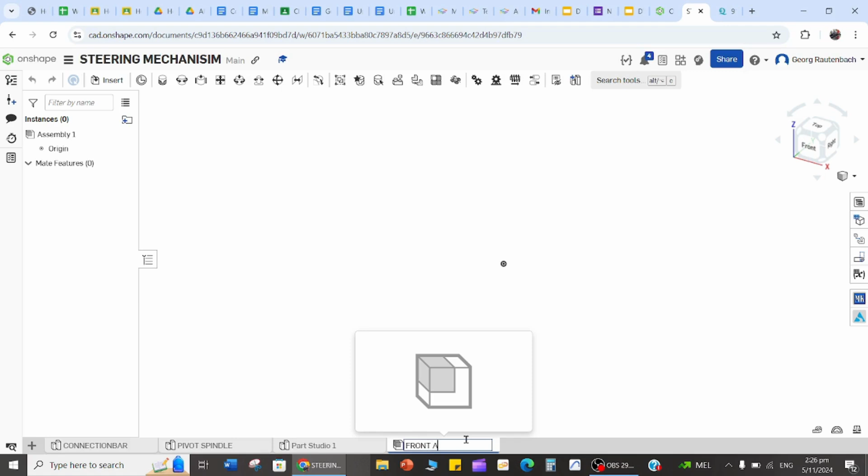I'm going to go insert, create new part studio, and then call it the front axle by right clicking on it. If I right click on that, you can just rename it and call it the front axle. Okay, so we're going to draw a front axle here. I accidentally opened an assembly by mistake, so I'll delete that one and create a new part studio. Then I'll right click on part studio 2, rename it, and call it front axle.

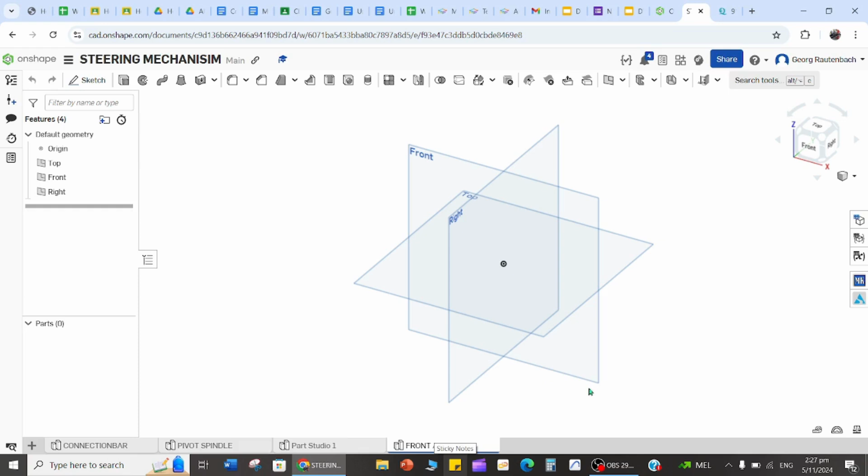Okay, and then I'm going to sketch the front axle here, so I'll go and start creating on the top plane. I can create a rectangle that is going to be 15 high, 10 wide, so I'll just do the corner point.

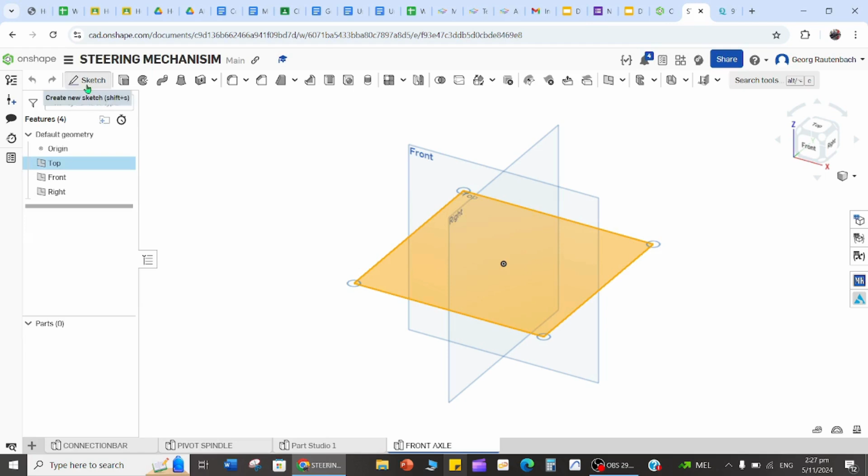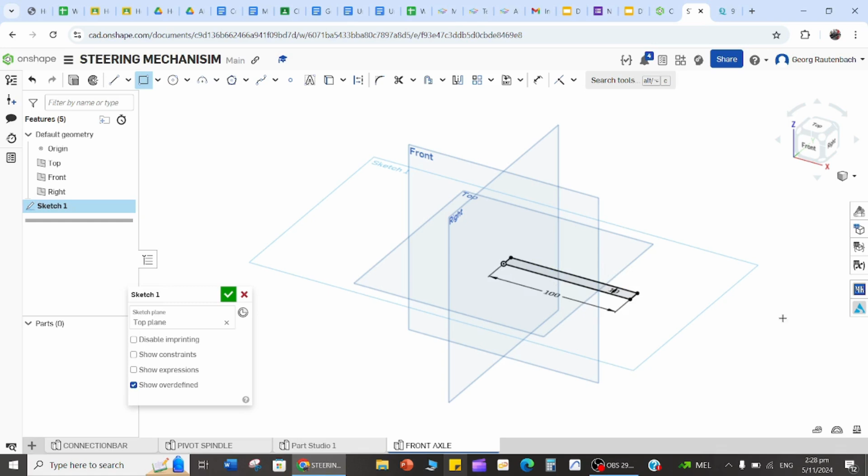So sketch the top plane, and then go to corner rectangle. I'm going to draw a corner rectangle here, and make it 100 long. I'll click once and make it 100, enter, and then make it 10 mils wide, enter, and then I will extrude that 15 mils.

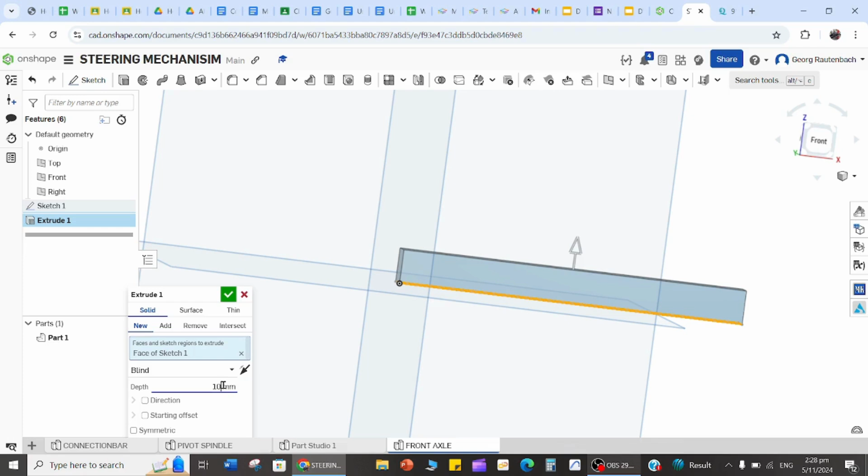I'll go to the extrude, click here, and instead of the 25 default extrude, I'll make it 15, enter, and then I can sketch my gaps in it as well. Let's make it not 15, let's make it 10. That looks better. No, it is 15, sorry. I'll make that 15, enter, and then I'm going to sketch on that.

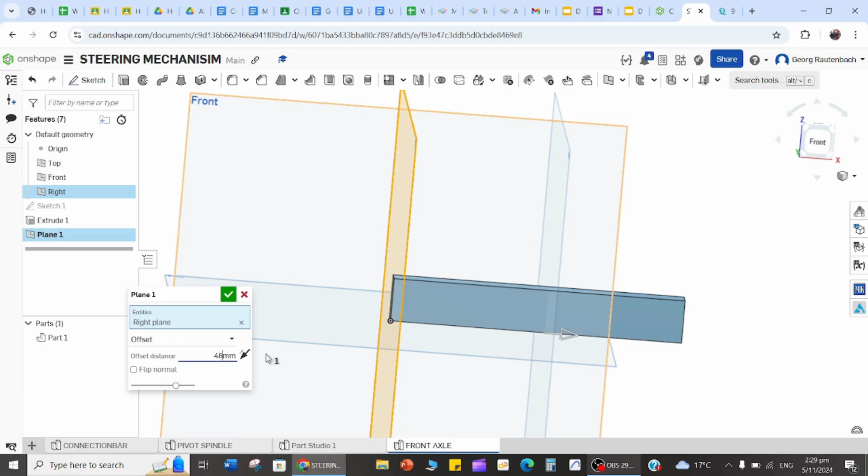So I want to sketch on this side and then on that side as well. If you want to sketch on one side and mirror it, you just have to put a plane right in the middle. So what I can do is go to the plane tool and use an offset plane, using my right plane as an offset, and then move it so it's in the middle. Since it was 97, it will be 48.5, and that will be right in the center. Then I can sketch on this side and mirror it on the other side.

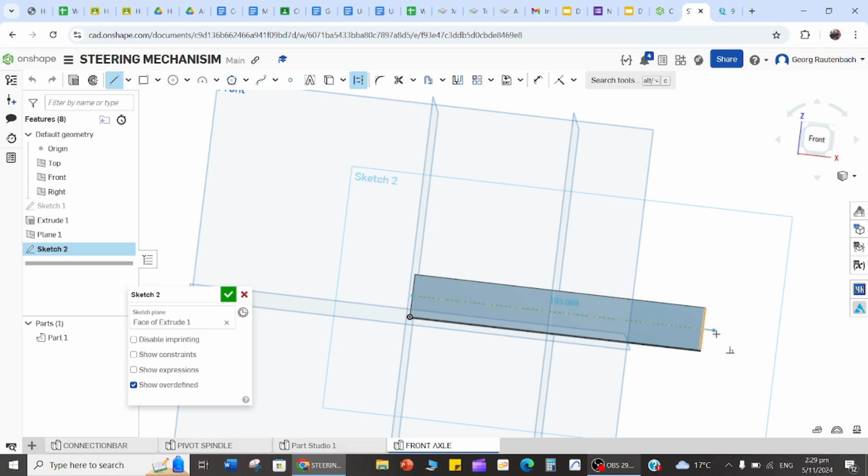So if I want to sketch on this plane, I'll quickly grab my sketch tool and click on that plane. Then I'll use my construction line, draw a line right through the middle, press escape, and then draw a line down, making that line 6 mils from the side. I'll do a construction line down there, and then go to my dimension tool and make that distance 6.86, enter.

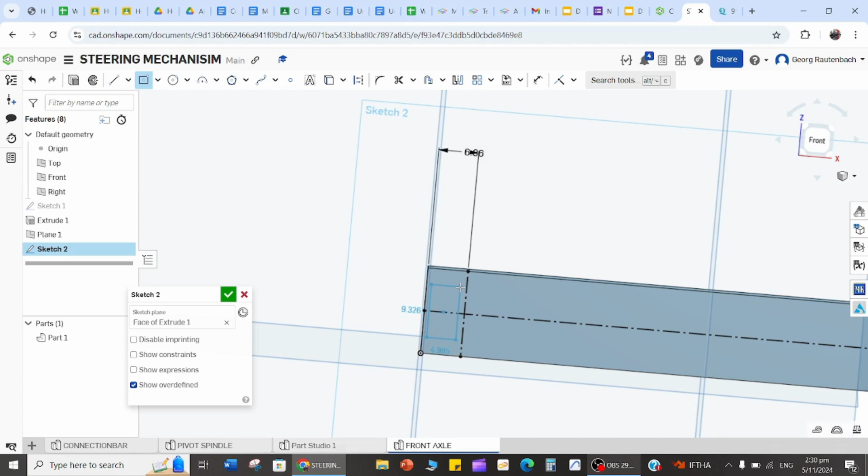Now I've got a little guide where I can draw using the center point rectangle. I'll hover over here and draw a center point rectangle, making sure it's on the line there. I'll click on this. I'll make the width 6.86, and I'll make the height 9.

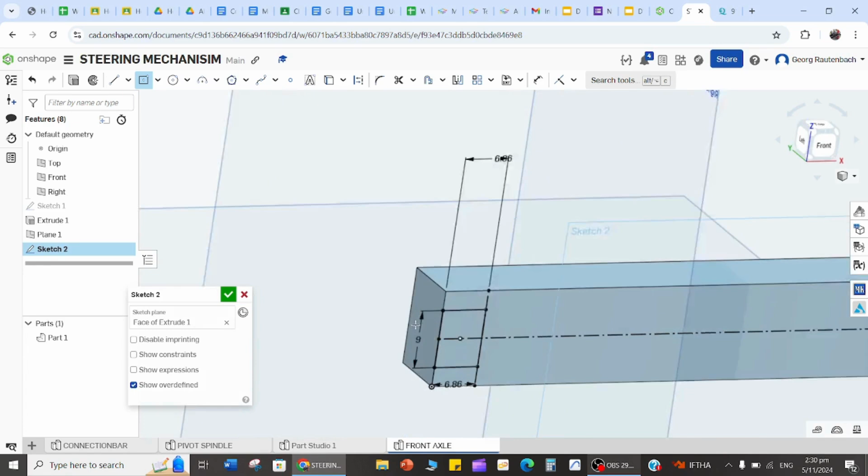And then I can extrude cut that right through. So I'll go to my extrude tool, click on that rectangle, and instead of adding, I'll remove it and give it a green tick. Now I just need to drill a hole right through and maybe just fillet the ends. So let's fillet the ends. We'll fillet them by 0.5, all those corners.

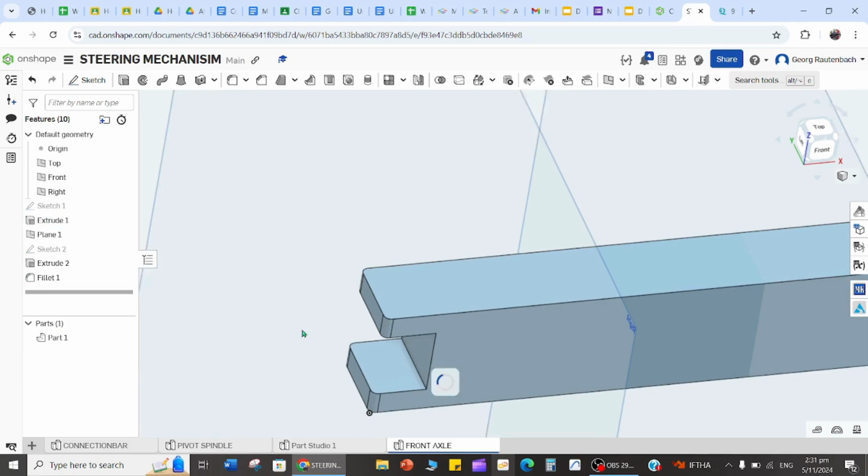It's just nice for the steering if you've got a roundabout there, and then we'll draw on the top of that. So we'll go to sketch, and on the top here I will draw the hole.

So I'll go with a 3mm hole there, just to house the pivot spindle that's going to hold the wheels.

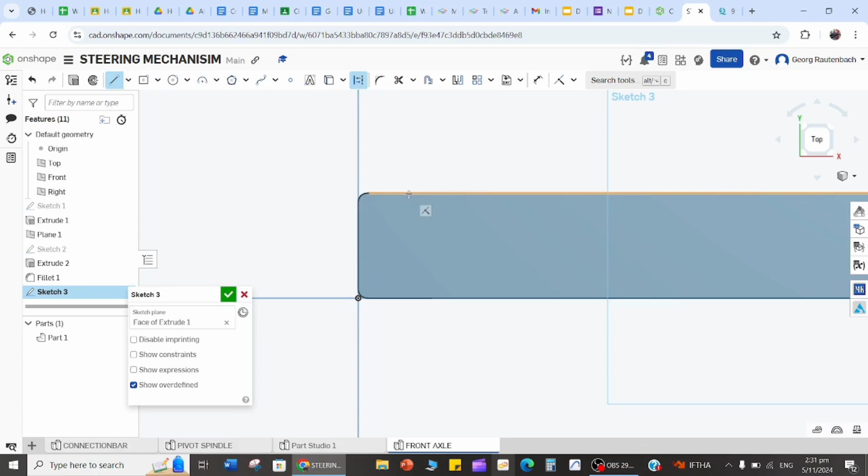So I'll draw a construction line again, and then go here, make the construction line about 4mm from the end, enter, and then a center line there.

So I'll use the line, my construction line tool, hover over until you get the orange block, draw a center line there, get the pivot. Oh, I didn't - I'll just have to Control Z that. You have to switch off the construction, otherwise everything else that you sketch stays as a construction line.

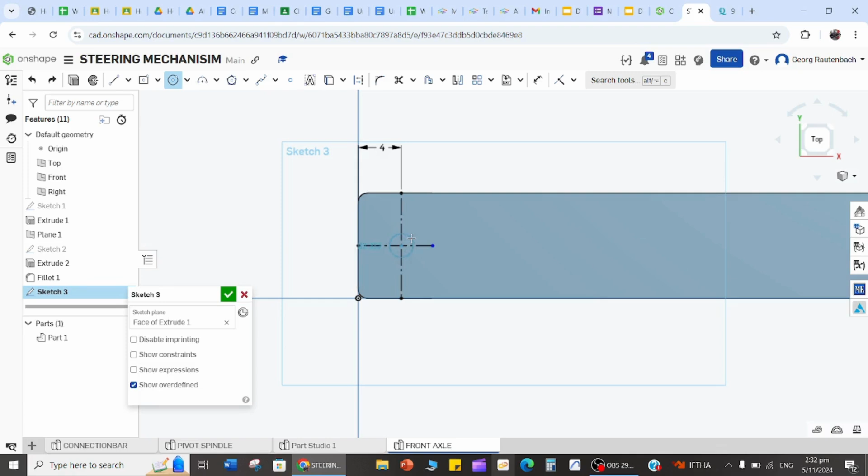So we'll make that 3mm, enter, and now I'm going to extrude that right through as well. So I'll grab the extrude tool, choose remove, and then I've got that there.

So now I just want to mirror this to the other side. What I'll do is go to the mirror tool, which is just this, and then I want to mirror feature, so it's going to be that, and then my mirror plane is going to be there, and then I'll just give it a

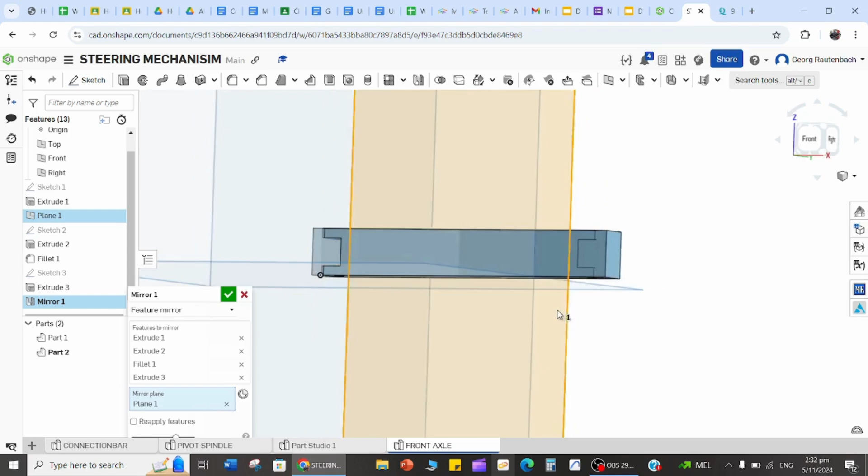green tick. I just want to see something's not right - Control Z. Maybe my center line, my center mark's not right in the center.

I'll just see if we go to mirror, maybe we'll just mirror a feature, and then the feature I want to mirror is that, and then my mirror plane is this side.

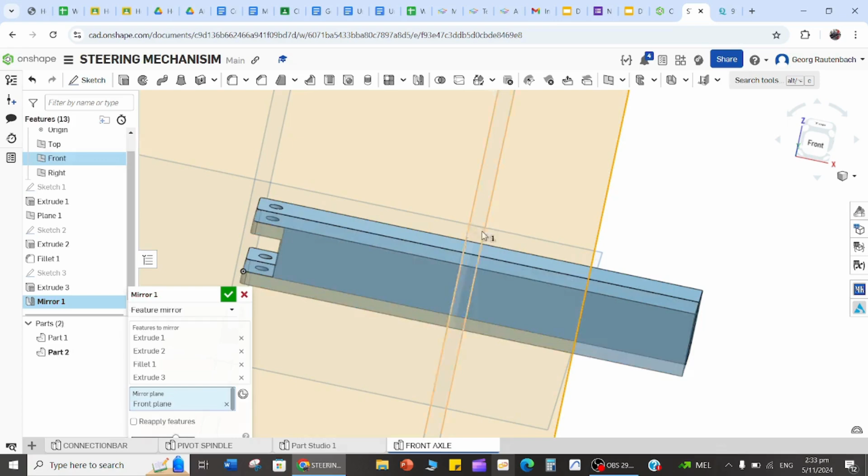No, I've chosen the wrong mirror plane. It's this one, and somehow... maybe I'll just mirror, use the feature mirror tool, and I'll just mirror that feature.

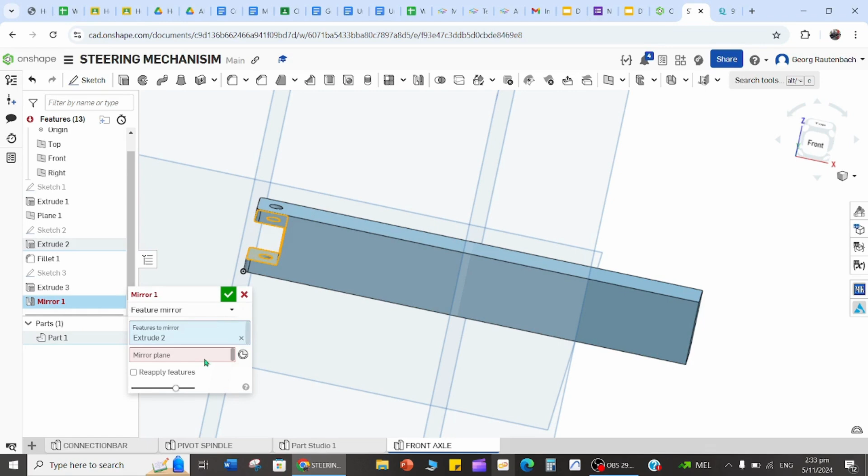No, Control Z. Click on the inside, and that's the feature I want to mirror, and that's my mirror plane. Give it a green tick.

Oh no, it doesn't like something. I don't think I'm on the center, so we'll just draw it on this side again quickly. So I'll click on that plane, sketch, and then I'll just sketch the whole part that I've sketched.

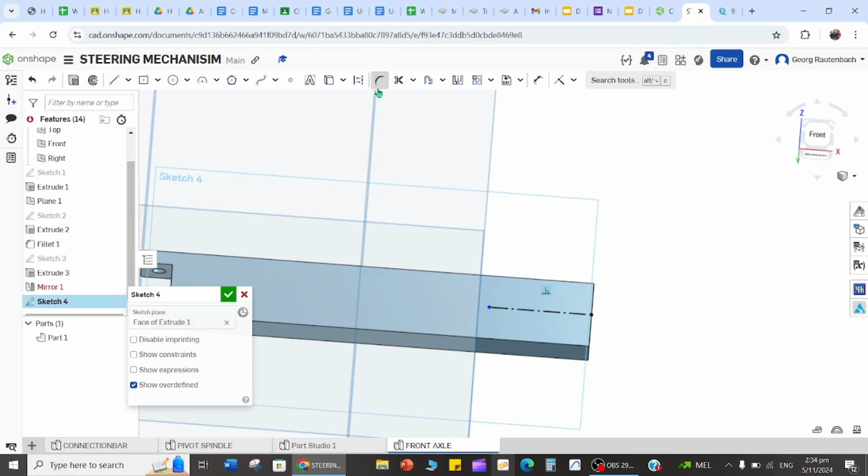So: line, construction line, draw a center line there, press escape, draw a line that's 6.86 down. So construction line, draw a line first at a random length, grab the dimension tool, draw a line that's

6.86, enter. Now I've got the guide for my center point rectangle, so I'll just grab the center point rectangle and draw it there, and make my first measurement 6.86.

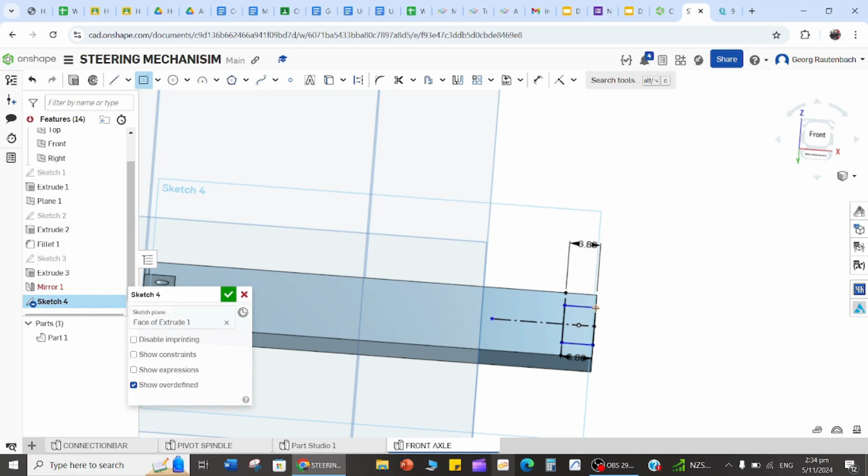Enter. My second measurement 9, enter, and then I'll just extrude and cut that out. So I'll go to the extrude, and then remove, give it a green tick, and then I'll just have to drill the hole in the top again.

So what I did is - let's see if we can - no, it won't mirror that. So sketch the top plane there, construction line, the line tool, draw a line there.

Make it 4mm from the end, 4mm, enter, draw a center line - line tool, construction line tool - grab a center line, draw it across, escape, use

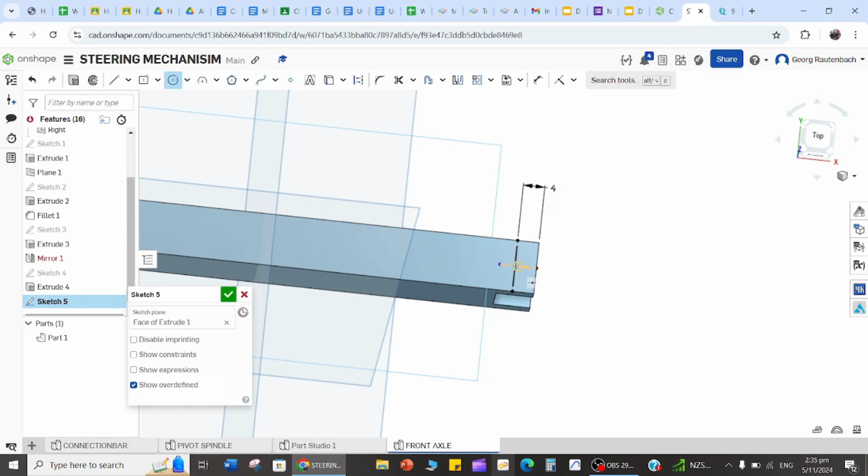this circle tool - I'm not on the center point there - circle, then make sure you're on the center point, make it 3mm, and then extrude, remove that.

So I'll go and extrude, remove, give it a green tick. Now I've got that, and I just have to fillet the end.

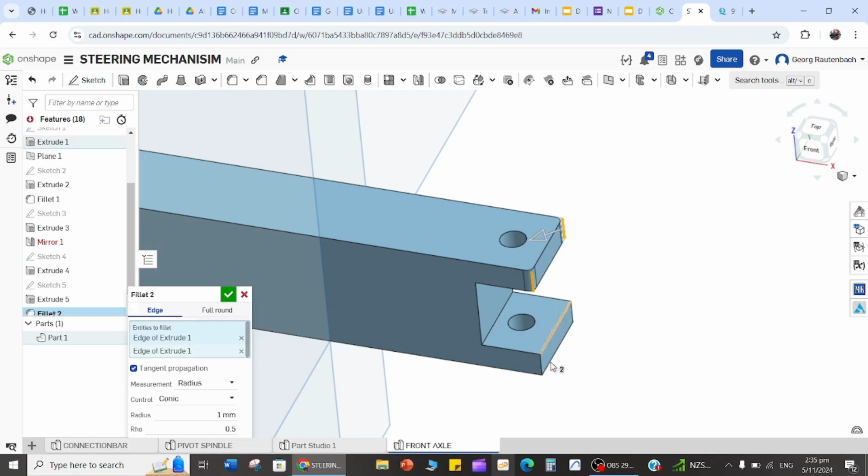So here's my front axle done, with spaces for the pivot axles to go through, and then I'll just have to draw one more part.